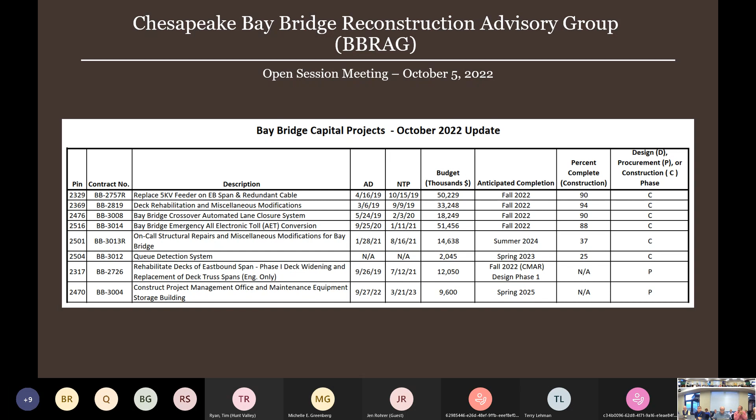Thank you, Jim. Any further tips? All right, my plan is to update you on some pending construction projects and existing ones. Starting with Queen Anne's County.

We're going to be resurfacing the two ramps near the Bay Bridge - eastbound US 50 to southbound Maryland 8 - as well as the merge lane from 552, which Brad brought up before.

Onto US 50, we're going to be paving that this fall. We'll be doing night work and coordinating with our MDTA partners to make sure we don't cause issues. At least one of those I know you brought up before, so I wanted to make sure I highlighted it.

In Anne Arundel County - you've probably talked to Barbara about this before - we're working on the westbound part right now, between Oceanic and Maryland 450. We plan to wrap that up before the end of this month, assuming it ever stops raining.

It's been raining for about six straight days for us. We're also working on southbound Maryland 2 from Cypress Creek to US 50 in Severna Park, with a similar completion time this fall. We'll also be doing eastbound 50, tentatively scheduled for next fall - so after westbound, we'll do eastbound next fall.

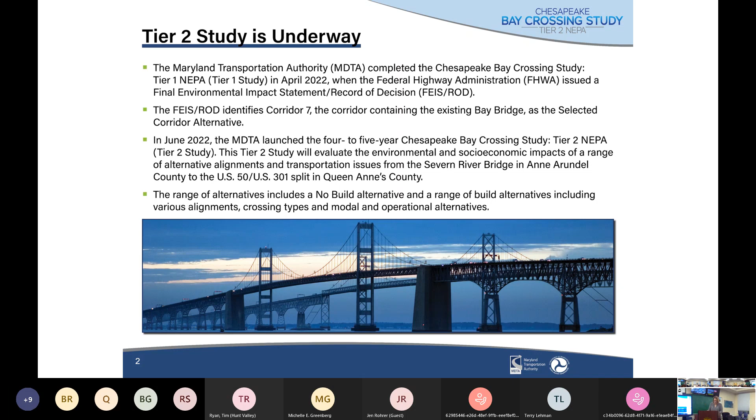I don't know what number you're on. That's the second one. Okay, thank you.

So the Tier 1 FEIS ROD, the Final Environmental Impact Statement Record of Decision, as you all know, selected Corridor 7. During Tier 1, we looked at the entire bay, 14 different corridors and crossing locations. We chose Corridor 7, which is exactly where we are right now, from the Severn River Bridge over the 50-301 split, looking at about a two-mile wide swath for a new crossing location.

As we move into Tier 2 and focus on Corridor 7, we will still be looking at no-build. No-build means Jim's going to keep doing the kind of projects he's talking to you about, but we won't be building new bridges or tunnels. One important point was that no-build does not necessarily mean progress. Keeping in mind the maintenance and repairs needed on these two bridges, moving forward to say 2040, we might not have all five lanes of capacity open. We might have lanes closed for maintenance, upgrades, or patching potholes. So doing nothing does not mean getting better.

Do nothing means maintenance and trying to keep the structures in good state of repair. We will also be looking at different alternatives within that 2-mile corridor, and we will be looking at modal and operational alternatives, including things like transit and buses. We did look at transit options, bus options standalone, and they didn't solve the problems we have here. In tier 2, we will be looking at those as components of additional alternatives, almost like an option to an alternative.

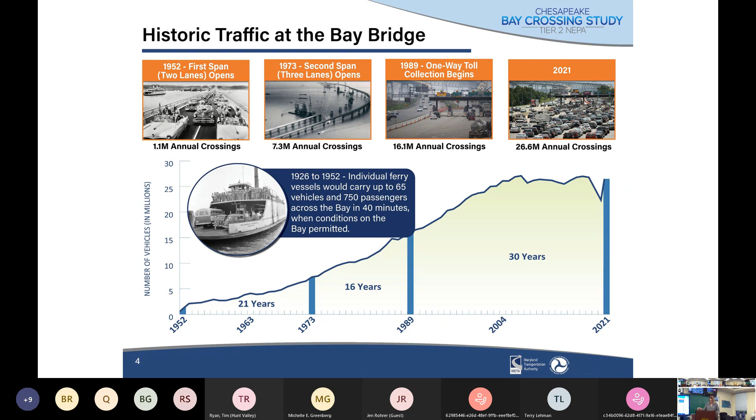Next slide, please. I don't really like this slide, I'm going to tell you why. This is looking at traffic numbers that we have in 2017 from the Tier 1 study. No surprises here. We're looking at 2017 peak weekday evenings, summer peak queues: 4 miles in the eastbound direction, 2.5 miles in the westbound direction. These things are familiar to you all.

Looking at 2040, we'd be looking at something like 11.1 miles going eastbound and 13.2 miles going westbound queues. I don't want to debate the numbers. We've had folks out all summer collecting new data, and we've got folks out there right now.

2017 is too old, we're getting all new data. Once we have that new data, which will be culminating this fall, come the new year, we will be putting together a new model. I am not certain yet what the year will be on that model, but it will either be 2040 or 2045, so stay tuned on that. As the model is developed and as we have more recent traffic numbers, you're going to be seeing these things going on again.

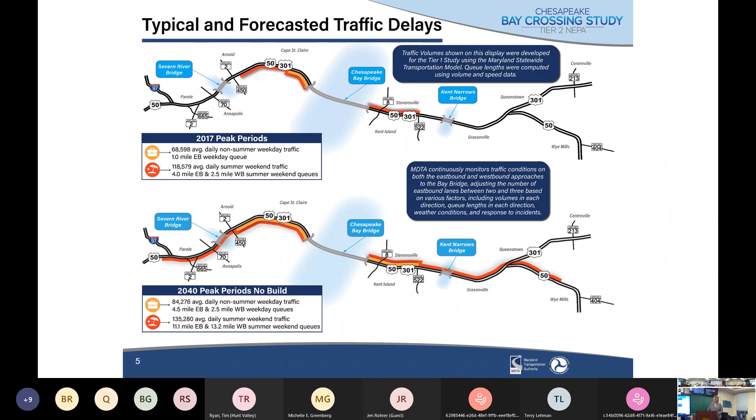Next slide, please. This is just a bar graph, I thought it was important to show. A lot of folks are asking about COVID: what happened, where are we, what's going on. Basically, what we're seeing is that numbers are coming back. In fact, some of our summer weekends, we actually have higher numbers than we anticipated than pre-COVID. The traffic has come back gangbuster, and we'll be back to regular traffic quite soon.

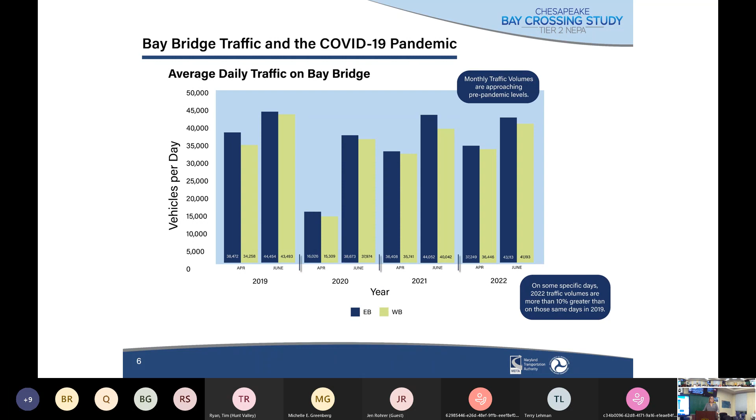Where are we, where are we going? We finished the Tier 1 study in April of this past year. Tier 2 study, the governor announced in June. We were right there at number 3, holding our meetings, starting to coordinate with the agencies, holding meetings with the public. As we move forward, it's going to be about a 4 to 5 year process. We are working on developing the purpose and need, getting that new traffic, doing environmental studies.

If you'll remember in Tier 1, we talked about desktop studies, which meant we were using computers and readily available data. As we move forward into Tier 2, because we will have this 2-mile corridor, we will be boots on the ground doing a lot more detailed, in-depth environmental analysis.

Okay, what are you guys doing to me? Go back, don't know.

So around this time next year, we'll be coming back out to the public and showing some of the alternatives that we've come up with. Keep in mind, we're not developing alternatives until we get that traffic data put into a model, run the models, and let the models show us what we would be doing. We'll be coming back out next fall.

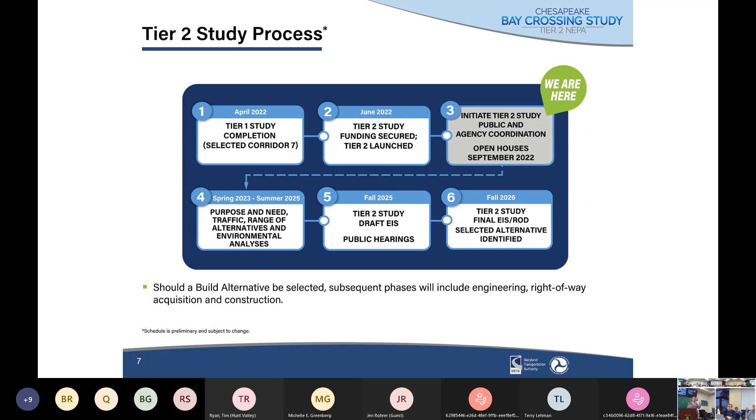I saw that the virtual portion is saved to the baycrossingstudy.com website. When does the comment period end? I encourage you to go there and look at the video. October - I say that because we are currently in the middle of the CTP tours. We end the discussion on the Bay Bridge by saying, check out the website, watch the video for yourself, and you can provide comments. This is all the comment information - you can call, you can email, you can use the QR code.

Provide comments in any of those different methods. If you go to baycrossingstudy.com, this is there, so you can see exactly what to provide. We're taking comments on that and on those meetings until October 14th.

That doesn't mean we can't provide comments afterwards. We'll do a summary of the meeting, saying how many attendees, how many comments, and the nature of those comments. So approximately 20% of the comments were concerned about the 2-mile corridor being too wide, and approximately 15% were concerned about EMS issues. We'll summarize with themes of comments.

Bay Bridge can overrun the 50/301 split, and it's bad traffic up to the Kent Narrows Bridge. On a good Saturday morning, when they're running good hard, it backs up. So I think stopping the study there is not going to be very productive. It's going to actually cause more of an issue, another backup. They need to go clear to 404 and put the overpass and stuff all in.

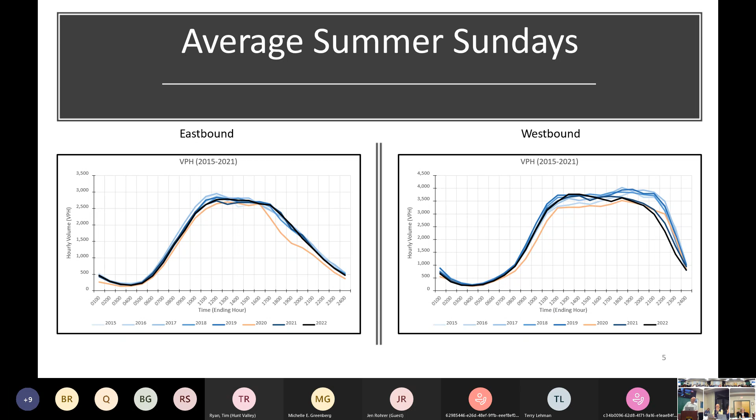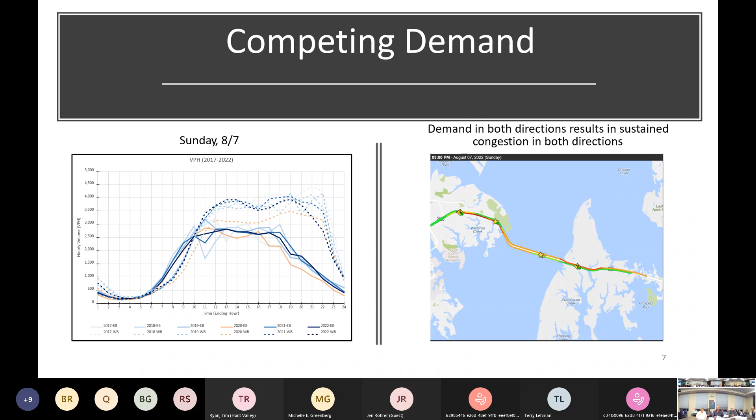So just to give you a quick update on contraflow. You've all seen this before, but we're pulling out the guts, the major areas, the trigger points on when we go in and when we come out. Just to update you based on what you heard from Jim, based on what you heard from Melissa, based on what you heard as a whole for the network, but looking here at the Bay Bridge. Next slide, please.

So again, you've seen this, there have been slight updates, remembering that we're trying to make sure we're sharing on both sides, and we've been able to make those adjustments. Contraflow will be implemented on the westbound bridge when eastbound traffic flow volumes start to reach 2,800 vehicles per hour, or eastbound delays start to reach 1.5 miles, which is approximately exit 31. That was reduced from 3,200 vehicles and/or 2.5 miles. So you can see how we've adjusted there.

Again, you've heard it all before many times, whether it's a major contributor to everything else. So that's when we're going into contraflow.

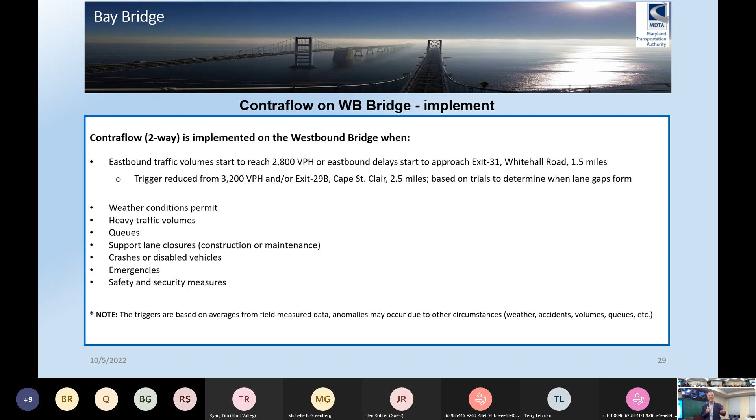Next slide, please. So when we're going to discontinue contraflow on the westbound bridge, again, it's constantly monitored. We get this question all the time, how often do you watch it? We're watching these every minute, we get updates every 5 minutes on the volumes. We have various individuals watching it.

So we will discontinue contraflow when the eastbound traffic volumes fall below 2,800, and traffic volumes in the contraflow lane are below 900 vehicles per hour. Again, that's that safety aspect for contraflow and head-on traffic.

Also, weather conditions become unfavorable, and or if westbound traffic volumes start to reach 3,200 vehicles per hour, or westbound delays start to approach 39A, which is Castle Marina 2.5, and if Maryland Route 18 is congested back towards Castle Marina Road. So we're watching on the bridge, we're watching on 50, we're watching on the side roads.

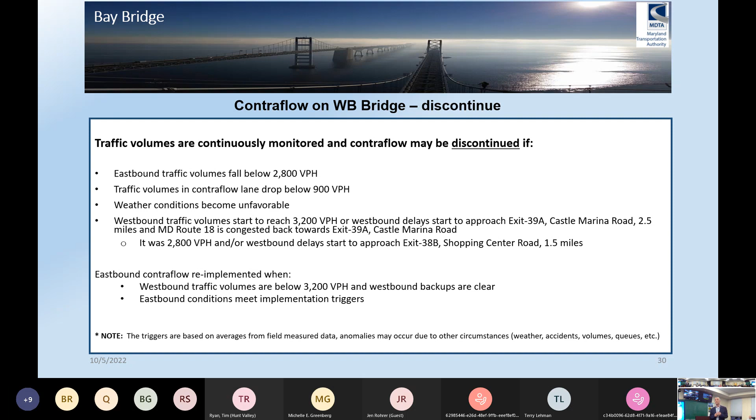And again, this was 2,800, and when westbound was reaching 1.5, you can see we've given a little bit again, kind of give a little time on both sides, kind of share that pain, right? So we will re-implement contraflow when the westbound traffic volumes are below 3,200 vehicles per hour, and westbound backups are clear, and or if eastbound conditions meet the regular implement triggers, as we mentioned before. So this is basically, go ahead and go to the next slide, but those two were the major updates that you heard, seen, that we stick with, and that we've modified to work with each side of our neighbors.

So contraflow summary: contraflow is based on traffic volumes, queues, accidents, disabled vehicles, lane closures, and emergency situations. Contraflow has typical ranges at times, but it's not based on scheduled hours. It's actual traffic conditions. Contraflow is weather dependent.

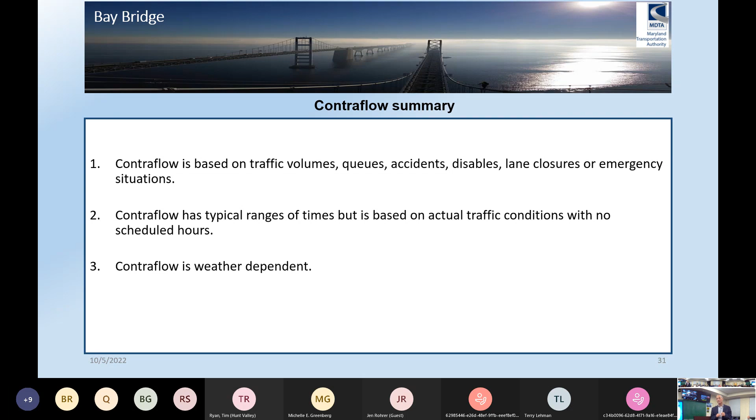And again, next slide is core issue: traffic volume exceeds lane capacity. It's not contraflow timing, it's not management. And again, you've seen this on Sundays every day. So, safety is always priority number one. And I know Pat has heard that. She said, it's all you say. And yes, it is. It's all we say. Safety is priority.

So that's all I have. Again, just a brief little update just to let you know, heard about all the backups, all the system, everything. We've modified and we've listened and we're modifying and we're starting to see a line. I think we're starting to share.

Everyone's sharing. So I got a question. So with the new gate system, you're the gatekeeper.

Right? You're the gate, you're the one watching the volume, you're the one that's gonna push it in and out of contraflow. There are multiple people watching it. Well, be that as it may, I'm getting to the point where, is it something where you feel that it could very well possibly be on a Saturday, or even a Friday, where you might go in and out of contraflow multiple times? And if so, what is your estimate of when you say, I'm gonna go into contraflow and the gates are all operational, what's the time before cars are actually traveling on the westbound bridge?

So we do that flip back and forth today. I know you do, yeah. I know. Over and over. Yeah. So when the gates are implemented, okay, we will go through the same process, of when and if traffic volumes demand, we will be flipping back and forth.

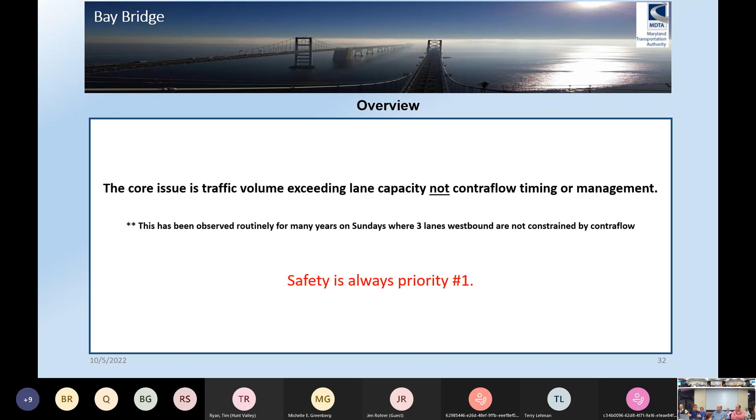We used to never allow backups in the westbound direction because we didn't want to back up the local roads on both sides. Now we're allowing a little bit, but from a risk perspective, we've said we're not going to let these local roads on both sides be congested at the same time because we're, same as the public, concerned about EMS being able to get to the bridge. If we have an accident and both directions are backed up along with the local roads, now you have a big problem—you can't get anybody there to respond.

So our ability to switch back and forth multiple times is really about the conditions on the ground. As we implement this, we're certainly going to be talking to the BRAG, showing you what's happening, assessing if there's opportunities to share the pain because we get a little bit of operational efficiency moving back and forth. But that will really depend on the success of how drivers respond to it, whether we can keep people on 50—all of these things working in concert.

And a year down the road, when we're all here together, happy, smiling, right?

We have general procedures that we've put together as we go for what we currently have today, and plans that we have in place. All of those are constantly monitored for efficiency and safety. So as we gain those efficiencies and that safety, we'll hopefully be able to make it a lot more efficient in one way or another, but adhering to safety, of course, while making it efficient.

Thank you. Absolutely. Any other questions?